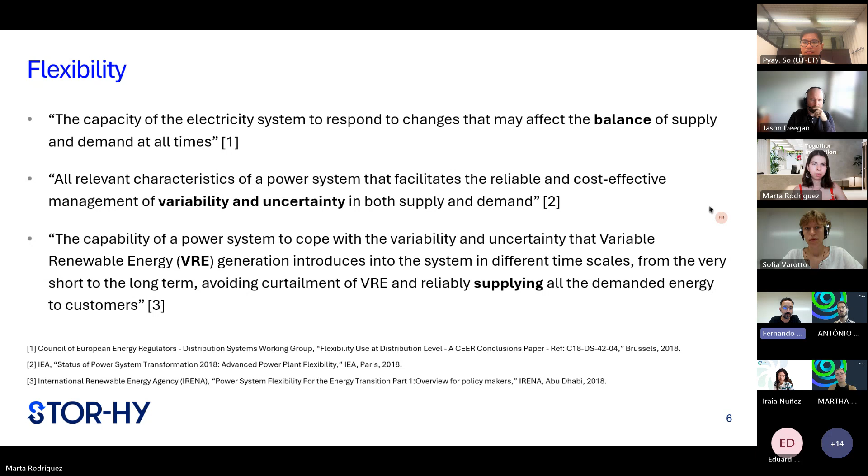So, okay, so flexibility can be used in many different ways. Okay, so the first one is power. So, oh my God.

Sorry. So the first one is power, balancing and frequency regulation. As you know, frequency is a system-wide measurement. So, sorry, I don't know what is happening. Sorry. So power is used for the short-term balancing of the power system, basically balancing supply and demand.

If we talk about the second topic, which is energy, this is medium to long-term system adequacy and resource scheduling. This can range from hours to multiple years. So it's a completely different approach to flexibility from power.

Then flexibility can also be used for power transfer capacity, for congestion management, and it ranges from minutes to hours.

And finally, there is also the possibility of using flexibility for voltage stability, which is a very important topic, as in Portugal and Spain there was a blackout a few months ago, related to this topic, which is reactive power control. Flexibility can be used for enhancing voltage stability, and this ranges from a few minutes to tens of minutes.

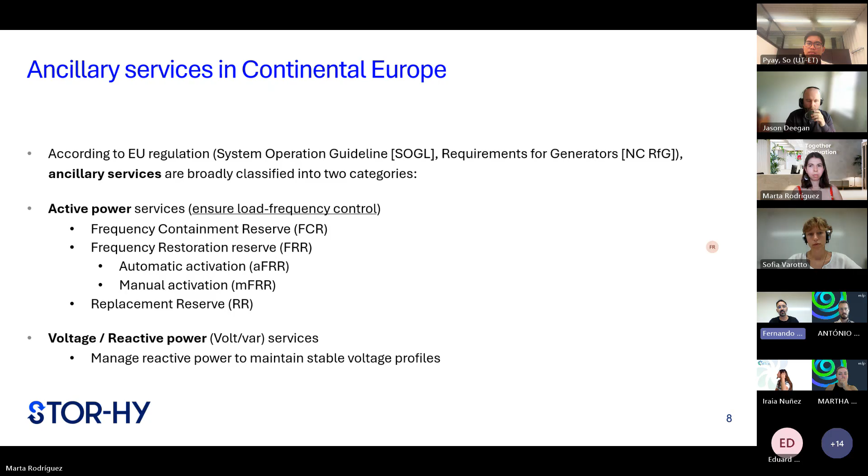This is loosely the load frequency control, which involves sequential reserves that I'm going to talk about in more detail here. And then there is the management of reactive power to maintain stable voltage profiles. We will go into detail on this now.

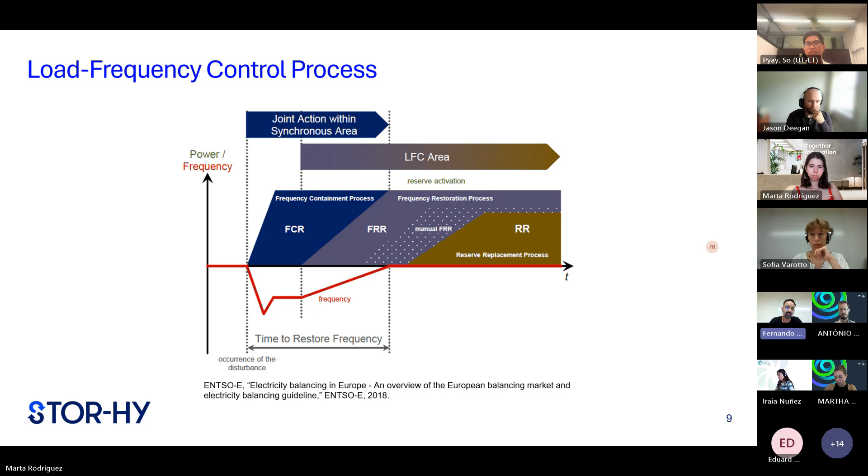So again, the FCR has the objective to contain the frequency immediately after an imbalance, and this is ensured by local controllers in each of the power plants that participate in the FCR. What needs to be ensured is that in less than 30 seconds, there is a full activation of this reserve. This needs to ensure that the transient frequency must not go below 0.8 Hertz, and the steady state frequency must not go below 0.2 Hertz.

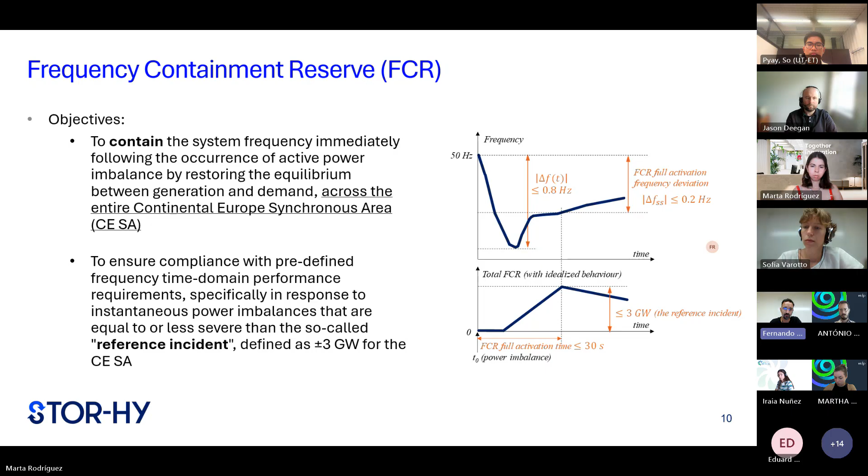So this is how it is dimensioned, and this is relevant because each of the power plants shares a burden of this reserve. In terms of the technical requirement by the European TSOs, the frequency containment reserve is designed to ensure a reserve of 3 gigawatts, which is the reference incident, or the loss of the 2 biggest power plants in continental Europe.

Then we have the frequency restoration reserve, which has the duty to control and restore the frequency to two objectives: to restore the frequency value to 50 Hertz, and to ensure that the active power balance between the different control areas, meaning the import-export, is as it was established before the incident. The area control error is a linear combination of these two measurements: the frequency deviation and the active power deviation from the interconnection flows.

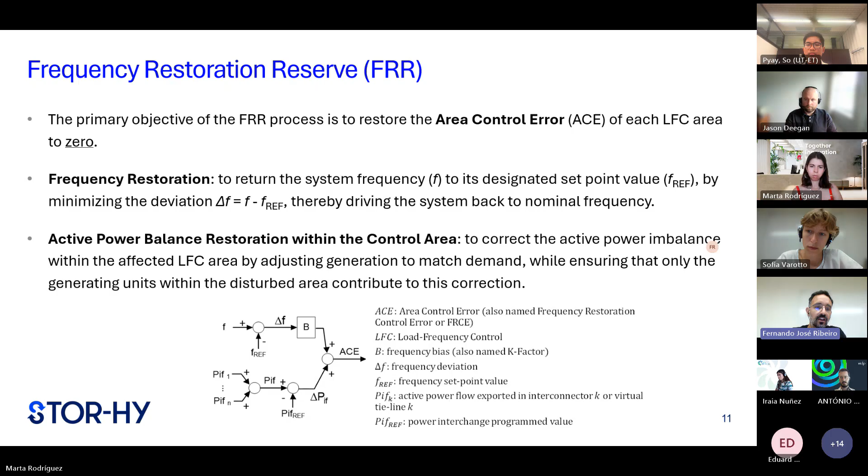And then the frequency restoration reserve is divided into two different requirements. The automatic frequency restoration reserve is activated, as the name says, automatically, by a signal dispatched by the TSO to each of the power plants participating in this reserve, and the plants must respond in less than 30 seconds. They must ramp the power up and down, and the other requirement by the TSO is that the time to restore frequency is 15 minutes, meaning the full activation time of the reserve has to be less than 15 minutes.

And then we have the manual frequency restoration reserve, which is manually activated by the TSO. This is not an automatic signal generated by a control device; it is manually activated. In fact, the time to restore frequency is also 15 minutes, but this is sequential. So when the aFRR is not enough, the TSO activates the manual frequency restoration reserve remotely.

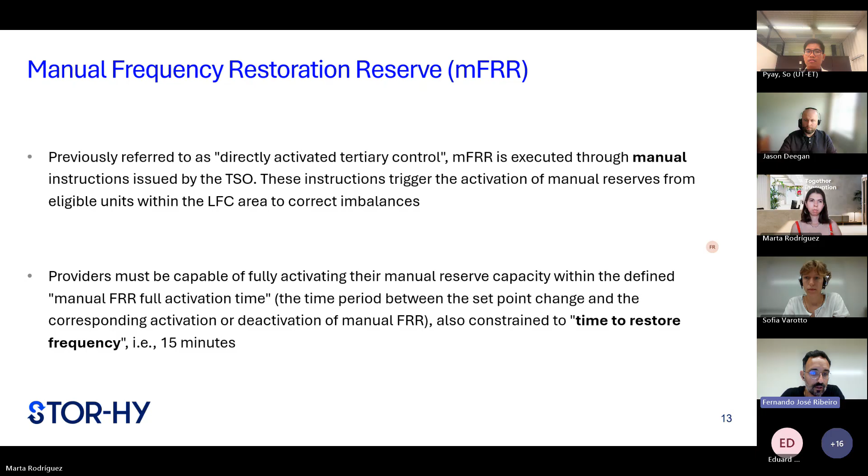And then finally, there is the replacement reserve, which gradually replaces the previous layer of control. This is for longer time horizons, with a time frame ranging from 15 minutes to 1 hour after the initial disturbance.

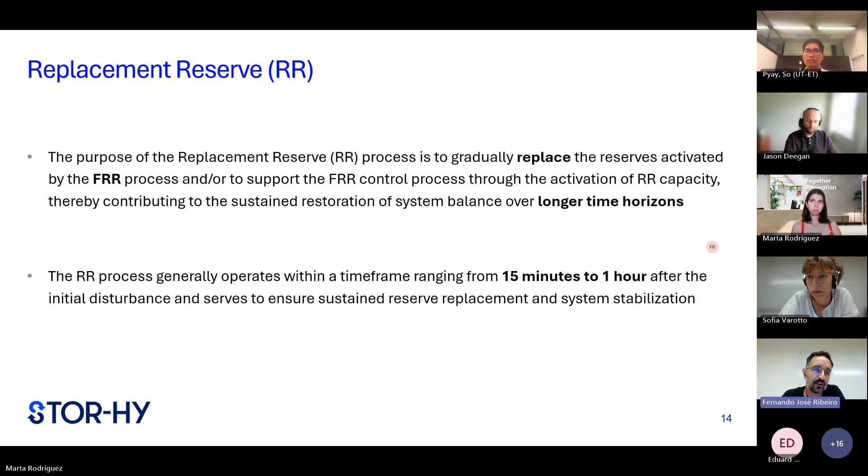So again, as you can see, we have fast reserves from 30 seconds onward. We have one type of reserve, then another, and then another. So there are different requirements. I will not go into detail on all of them. This has been harmonized in Europe, and I will show you the existing initiatives afterwards.

So now, different topic: voltage and reactive power. This is a combination of manual and automatic controls. The objective is to ensure that voltage levels and reactive power flows are acceptable for the TSO.

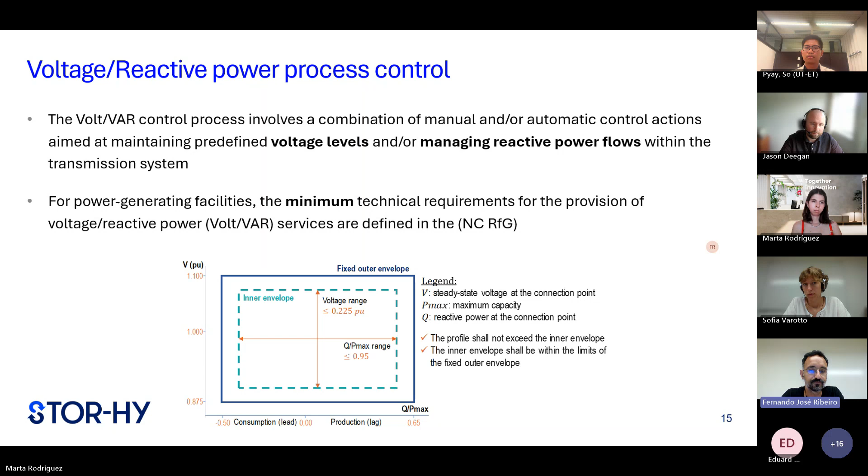Then we have something which is not yet in continental Europe, an ancillary service called synchronous inertia. Basically, this is a physical property of rotating machines that allows them to store kinetic energy and inject it into the power system whenever there is an imbalance. They have a fundamental role in stabilizing the frequency after this active power imbalance.

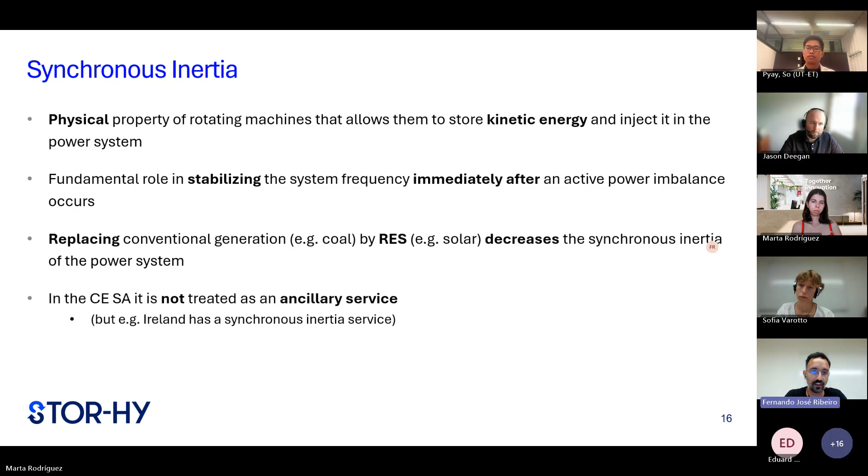The fact is that replacing conventional power plants with renewable energy is decreasing the synchronous inertia in the power system. So maybe in the future this will evolve as an ancillary service, such as what is happening in Ireland now, where there is a minimum inertia requirement for dispatch, and maybe there will be a remunerated service in the future. So far, it is not the case in continental Europe. So, synthetic inertia.

The fact is that renewable generation is interfaced with power electronics to the grid, and although they do not contribute kinetic energy for synchronous inertia, they can provide synthetic inertia, which is a controlled active power response, typically proportional to the derivative of the frequency, and this can actually be used as a faster way than the frequency containment reserve.

So on the one hand, they do not ensure the inertia provision that is instantly provided when there is an imbalance. On the other hand, they can provide a service that is faster than the fastest service that exists nowadays. This is relevant because some pumped storage plants can also be interfaced with power electronics, and they can provide synthetic inertia.

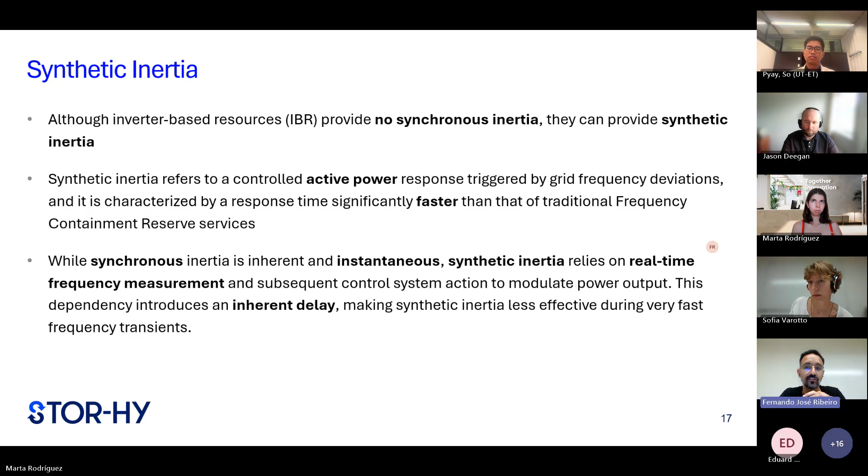The fact is that this relies on an instantaneous real-time measurement of the frequency, so this will never be as fast as synchronous inertia. There is a delay, but in fact, in the future this will be used as an ancillary service.

Alternatively, there is fast frequency response, which is normally a step response for active power. This is also faster than the frequency containment reserve, but it will not respond proportionally to the rate of change of frequency—it will be a step response of active power.

This already exists in some markets, such as the Nordics, the UK, Ireland, and Australia. Although this is not implemented in continental Europe yet, and it's not planned for the medium term as far as we are concerned, maybe in the future this will be an ancillary service, and we are considering it in the STOR-HY project.

So then there is Black Start. There was a blackout in Portugal and Spain some months ago, three months ago, and this was much discussed afterwards, because Black Start is the capability of the power system to restart operation after a blackout—starting from a completely de-energized state and slowly re-energizing parts of the grid.

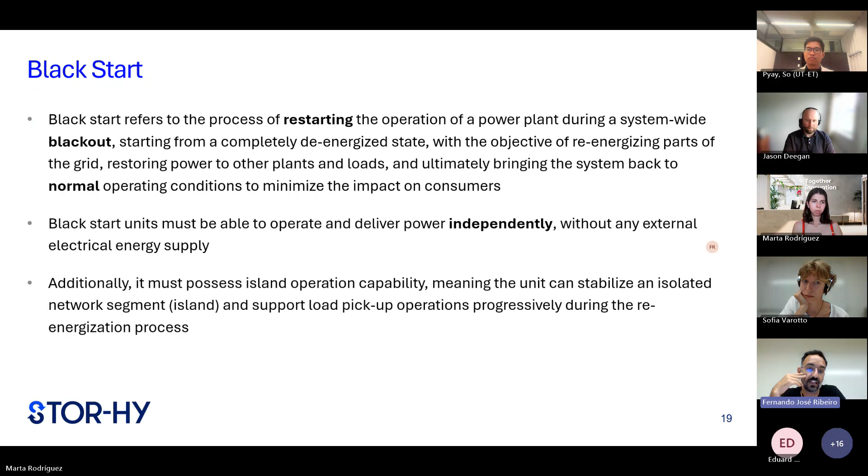Black Start units need to be able to operate independently without being supplied by the grid, since they are the ones energizing the grid. So the power plants with this capability must be able to operate in island mode, with very wide frequency oscillations and so on. Hydropower units are candidates for this, as is the case in Portugal.

And then what I will show you from now on is that the European Union has very ambitious objectives of integrating all these markets I've been talking about, basically harmonizing all these products all over Europe, so that the main objective would be to integrate all these markets into a single market all over Europe, to ensure market efficiency and market liquidity and so on.

So I will start. This will be just a brief overview. In the deliverable that we finished just now, there will be lots of detail.

So basically, for the FCR, frequency containment reserve, already 50% of the needs for continental Europe are already integrated in a single market platform. 9 countries are participating. This is a symmetric product, meaning upwards and downwards reserve need to be provided in the same power range. The duration of this product is 4 hours. There is a minimum and maximum bid size, and each country has to provide minimum and maximum. This is due to the fact that it ensures no free riding and no constraints in terms of power transfer capacity.

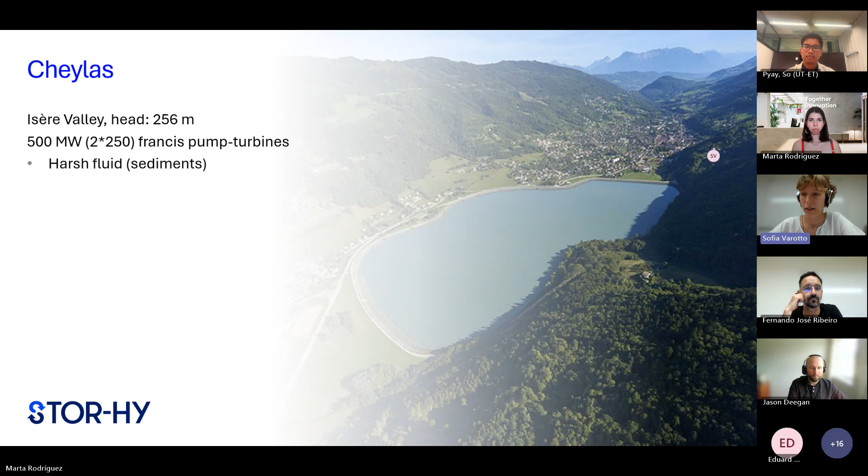It is, as we said, characterized by harsh fluid, so with a high level of sediments and a high pump turbine cycling. So the 2 main objectives in STOR-HY will be to enhance flexibility by also enabling faster response to the market,

and to minimize the start and stop cycles through the development of innovative mode changes through a fast dewatering scheme. Then the wear and tear impact of these fast mode changes will be assessed, and also the transfer of sediments

between the upper reservoir and the downward reservoir, which could have some environmental benefits, will be considered, but also the possible effects on overall efficiency that could be decreased by this addition of sediment transfer.

Moving to La Rance, the tidal power plant, it is located in an estuary, as you can see from this picture, so the head is very low because it depends on the water level difference created by tides. It is composed of 24 bulb turbines of lower power.

The challenges that this plant presents are mostly related to salt water. So the first one is corrosion of the mechanical components that need to be maintained and also probably replaced more often than a plant operating in non-salt water, so in a river.

And mussel fouling, so the possible growth of bio-organisms on the mechanical components that can also hinder the efficiency and that needs to be removed periodically. Another thing that hinders the flexibility of this plant is that electricity generation is strongly dependent on the tide schedule, so it is not easily adaptable to market signals.

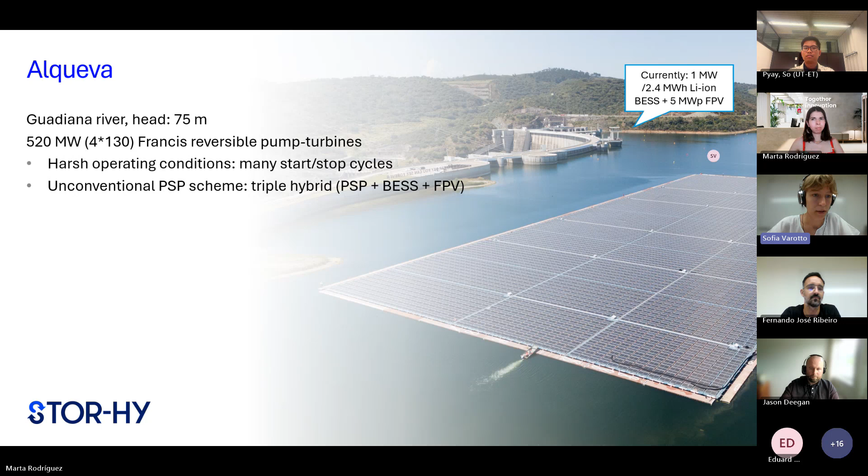So the objective for STOR-HY will be to explore to the fullest the possible benefits from this triple hybridization, both in terms of flexibility and in terms of wear and tear.

First of all, there will be the development of an innovative energy management tool to also enable the participation of this plant in ancillary services markets, or improve the current participation in these markets, and also to minimize the wear and tear of the hydro machinery.

So the fact that the battery can be combined with the hydro energy generation from the hydropower plant can reduce the wear and tear due to fast power changes in the hydro machinery.

Okay, finally, there will also be some battery sizing studies aiming at maximizing the benefits of this operation. So it will be considered to enhance the capacity of the current battery energy storage system.

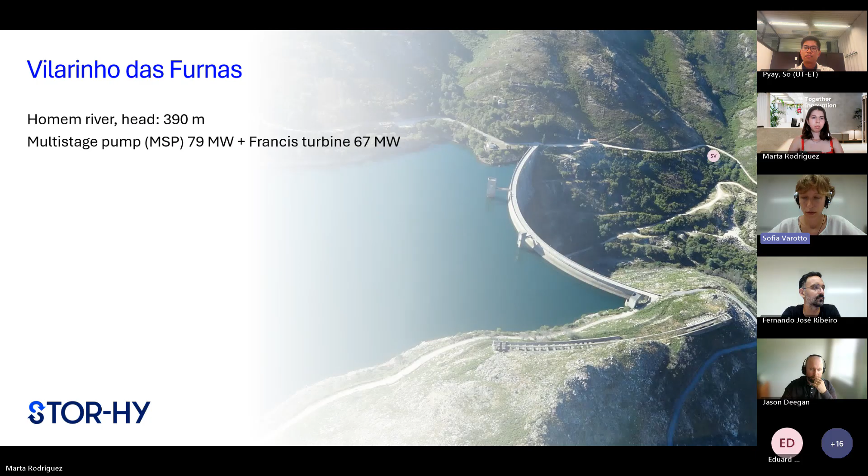Vilarinho das Furnas is located on the Homem River in the north of Portugal. It has a relatively high head of 390 meters and is currently composed of a multi-stage pump and a Francis turbine. The flexibility enhancement during STOR-HY will regulate the operation of the pump mode and turbine mode with the operation of the main inlet valve, without using variable speed solutions, just operating the inlet valve.

For this reason, there will be a need to assess the impact of the inlet valve in terms of wear and tear. Fatigue models will be developed for this valve, along with an advanced valve control algorithm to minimize the wear and tear.

Finally, Pozo Figueiredo, which is currently located in a coal mine, as you can see from this picture. It's a pioneering scheme to reconvert an old coal mine into a pumped storage system. It is composed of 3 mine pit reservoirs with 2 different heads, and 1 pump and 1 turbine of 100 kilowatts each.

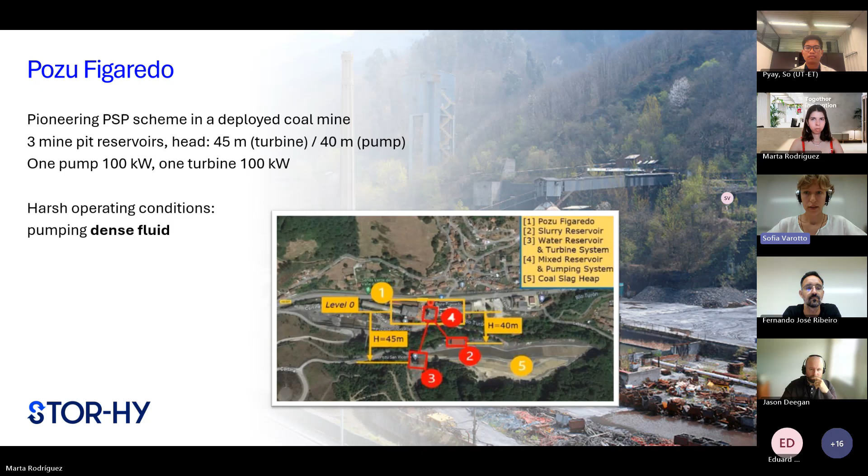The harsh operating condition that characterizes this plant is the dense fluid that needs to be pumped and turbined. For this reason, in STOR-HY, attention will first be given to the plant commissioning that is currently being constructed. Then hybridization with a battery energy storage system and a photovoltaic system will be considered, and an energy management system for this combination will be developed.

Now let's move on to the flexibility matrix, which, as you can see, is defined as a preliminary version because this is the very beginning of this project. I will present to you the structure of the matrix and the first ranking for the base configurations.

This matrix considers the techno-economic regulatory dimension of STOR-HY, and it encloses the ranking in terms of capability of providing ancillary services to the grid from each of these plants. In the preliminary version, only the base configuration or existing configuration will be evaluated.

The ranking will be based on a traffic light system, so it will be qualitative and will just give some preliminary evaluation of the capability of this ancillary services provision.

This is the color system that we're using to fill in the matrix. In red, when the plant is considered not to be capable to provide that service. In yellow, when it is considered capable, but with a limited capability that in some cases can be enhanced with the technological solution proposed in STOR-HY.

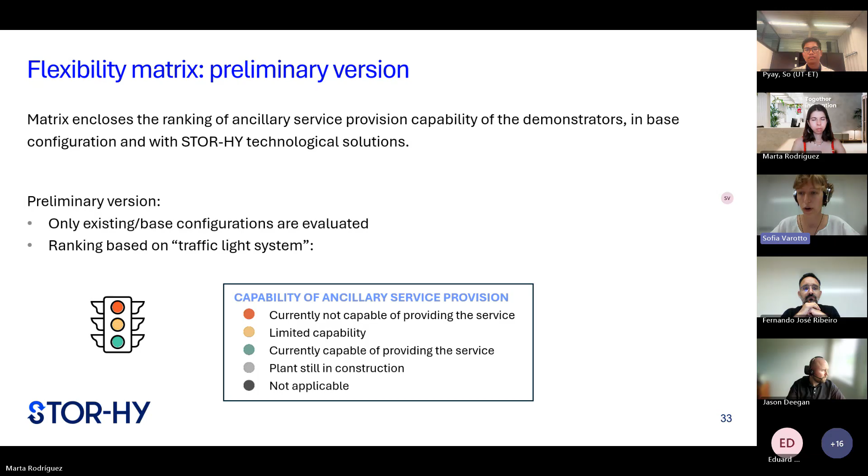This is the structure of the matrix. I will go through the different components of it. In the top part, there are the ancillary services, and in the bottom part, the traditional definition for those. So synchronous and synthetic inertia, and then the frequency support services in order of rapidity of operation. Then the voltage and VAR control, and finally the black start operation.

On the left side, there are the demonstrators that I just presented to you. On the right side, there are the different technological solutions that will be developed for each demonstrator, particularly the ones that have some impact on flexibility. Here is the legend that explains this.

In the base configurations, they are all considered to be fixed speed. In some cases, variable speed will be implemented. In other cases, just a reduced scale power converter, and hydraulic short circuit and hybridization with batteries and photovoltaic. On the bottom, there are the emerging European framework definitions for the different services, as Fernando explained. Here is the legend of the colors, just to start filling up this matrix.

First of all, the black dot means that the plant is not considered applicable for that particular service. This is the case for synthetic inertia and fast frequency response in fixed speed units, because of the hydraulic dynamics of the hydro units, it is considered that these very fast services cannot be provided. So it does not even make sense to evaluate this ancillary service.

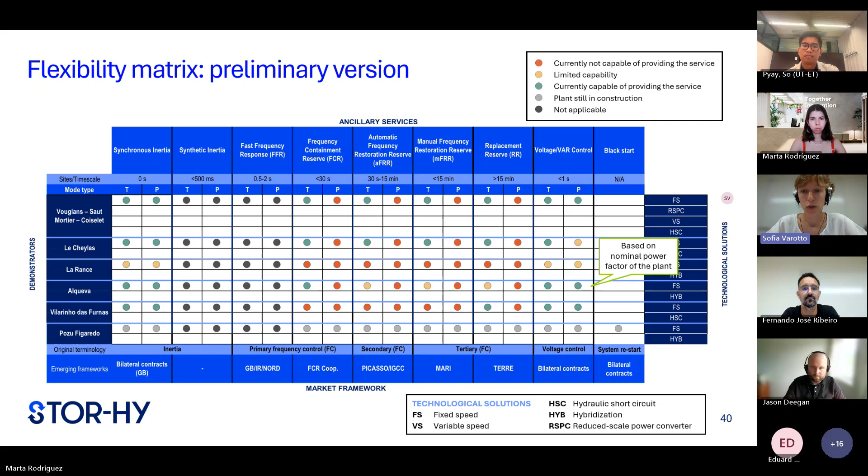Moving to voltage control, we obtained this ranking from the nominal power factor of the plant, which relates to the capability of providing reactive power. We see that in most cases it is quite good, except for La Rance, which has a relatively low power factor. Finally, in Black Start, we see that none of the plants is currently capable of providing the Black Start service except for Le Cheylas.

Le Cheylas is characterized by a startup time of 5 minutes and a ramping capability from 0 to full load in 2 minutes.

So this is the current version of the matrix, the preliminary version that will be filled up along this project. Our next steps will be to transform this ranking from a qualitative traffic light type ranking to a quantitative system, obtaining numbers for which we will need to perform simulations enabled by the development of models for the different demonstrators along this project.

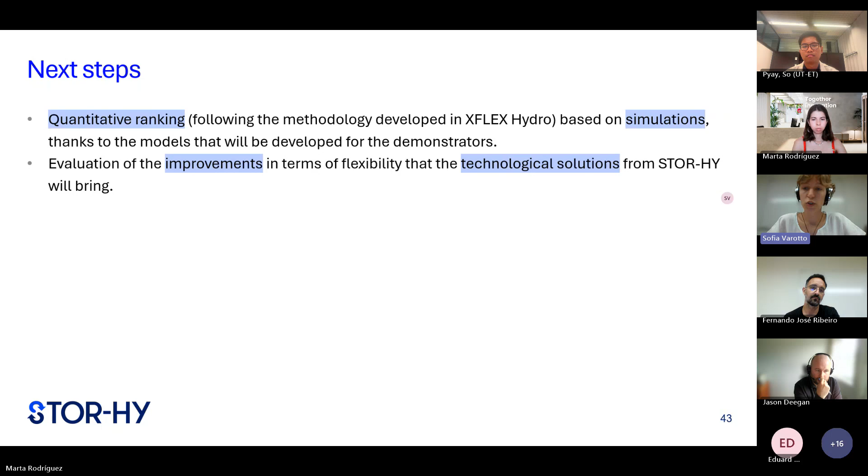We will also evaluate the improvements that the technological solutions in the different demonstrators will bring, particularly in terms of flexibility. Our expectation is that variable speed will enable the provision of the very fast services that Fernando explained, such as synthetic inertia and fast frequency response, and will also generally increase the flexibility of the plant, even in pump mode, which is currently considered not flexible.

The implementation of hydraulic short circuit, meaning operating the pump and turbine at the same time, enables regulation of the net power when in pumping mode. If the power of the pump is fixed, by regulating the power of the turbine, the net power absorbed by the plant will be regulated this way.

Then hybridization with batteries and photovoltaic will also enable faster responses, faster frequency support services, and improve the services currently being provided. There are also other flexibility-related features not directly categorized as ancillary services that can be improved by these solutions, for example market participation or the capability of shifting load. As we said, this first flexibility matrix only considers the techno-economic regulatory part, the flexibility side of these demonstrators and the improvements.

So for the next sections about the environmental aspect and the social aspect, I will leave the word to my colleagues.

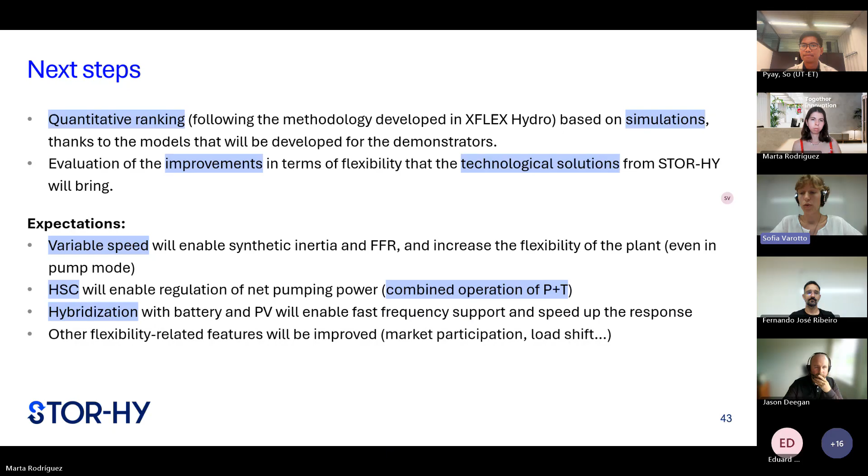Hello everyone, now let's move on to the environmental and economic dimensions. I'm taking over the slides.

All right, so in this session I will present three key components. I will start with the process of indicator selection and then what indicators we have selected, and then I will briefly explain the methodological approaches that we will use to quantify these indicators.

So we started with selecting which indicators we will measure in this deliverable, and the assessment will be done in another work package, work package 7, and then results will be integrated back to the STOR-HY matrix.

For this, we will use the combination approach of practice and science. On the practice side, we are developing the assessment models and collecting the necessary data for the case studies for each demonstrator site. On the science side, we have explored different indicators and existing methods for the development of new indicators and improve the methods to quantify the environmental and economic dimension. So this is basically the general approach and overview of our plan.

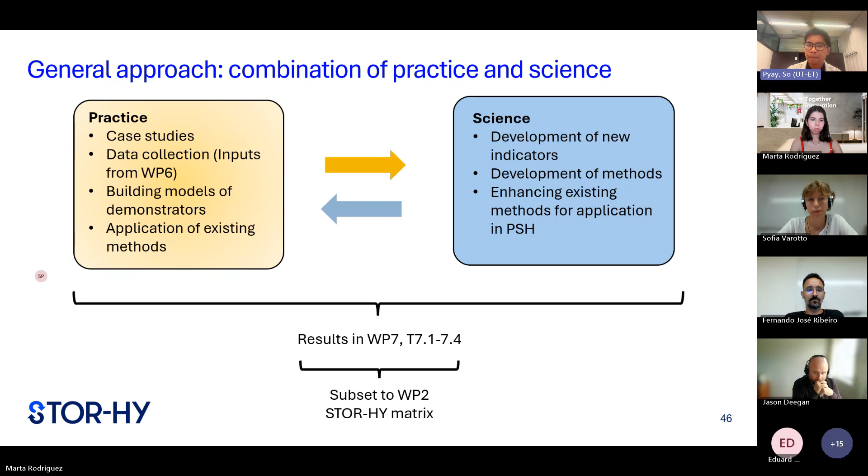So here I would like to explain a little bit more about the process of selecting the indicators. There are many possible indicators that we can use to quantify the different aspects of environmental and economic dimensions. First, we try to keep it open to explore what indicators are available. We did a literature search to collect all the possible indicators from international standards, guidelines, and scientific papers.

Initially, it was like a big menu card with a lot of possible indicators and options. We presented the initial selections of these possible indicators to our project partners so that they could provide us their inputs and suggestions. Then we came up with the final selections of the indicators, which was also proposed and presented to our project partners for the final selection. Now we have this final list of the indicators, and we will continue the quantification of these indicators in another work package.

So what are the indicators that we selected? Basically, there are three categories of environmental indicators and one category for life cycle economic indicators. For example, for environmental indicators, we have biodiversity impacts, in which we will measure the local biodiversity impacts occurring due to on-site hydropower operations, and also supply chain biodiversity impacts. I will go into more detail in the later slides. There are also other impacts such as life cycle impacts, which will cover carbon footprint, water footprint, land use changes, and resource dissipation. There are also circularity indicators, which cover resource dissipation and recycling rate. And for the economic dimensions, we will use CapEx and OpEx.

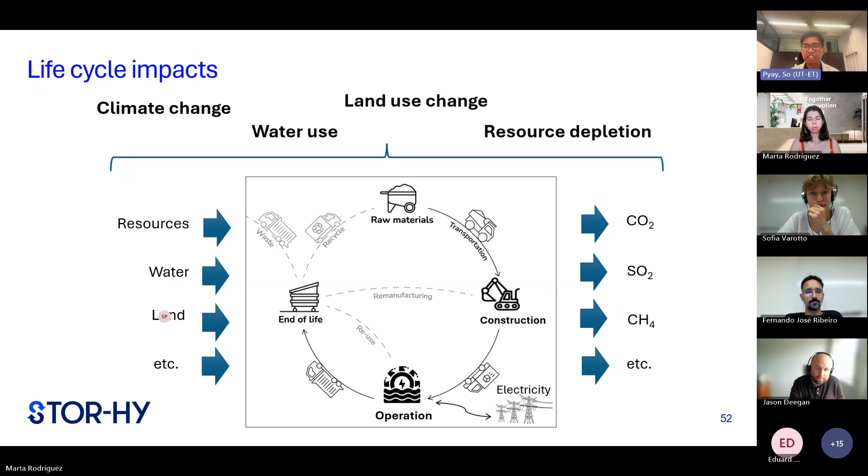The second category of impacts that we consider is the life cycle impacts. This diagram shows the general illustration of the life cycle of the pumped storage hydropower plant. Throughout its life cycle, it uses inputs such as water, resources, and land, and it releases outputs such as emissions and waste. These consumptions of resources and releases of emissions might cause other impacts such as climate change, water use, land use, and resource depletion.

In our analysis, we will cover these impact categories in addition to the biodiversity impacts. When we quantify these impacts, some parameters could vary temporally, which can affect the results. For example, if the electricity used for pumping water to the upper reservoir comes from the grid, and the grid mix varies temporally, the environmental performance of the pump storage system could also vary. This issue was not reflected in previous scientific research, and we will consider these temporal variations in our analysis.

To quantify these life cycle impacts, we will use the life cycle impact assessment approach. First, we will start with the conventional way of doing the LCA. In this conventional approach, we don't consider the temporal variations first. Therefore, we can quantify these impacts in terms of the static results.

Then we will improve this assessment approach by integrating temporal resolutions in our analysis, such as variations in electricity mixes, reservoir emissions, and storage technical improvement solutions. This assessment approach is called the dynamic approach, which will provide us LCA results in terms of dynamic results. By comparing these two sets of static and dynamic LCA results, we will be able to see how considering the temporal variations can provide more realistic results.

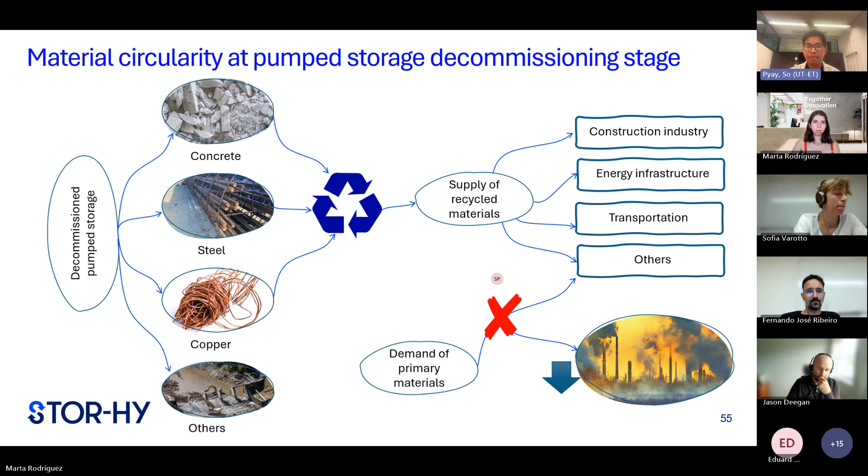The next indicator we consider is material circularity. When hydropower projects are decommissioned, one possibility is to deconstruct some infrastructure, which will generate construction and demolition waste. Some of this waste can be recycled, providing a supply of recycled materials to other industries in the future. This will hypothetically decrease the demand for primary materials, and also the production of these primary materials. When you decrease the production of these materials, it will also decrease the environmental pollution from this production process. So the circularity of construction and demolition waste is important to understand a more complete picture of the environmental impacts, and even possible environmental credits, in pumped storage projects.

This is why we will consider this indicator in our analysis. Our methodological approach for this indicator has two steps. First, we will focus on the current conditions. We will estimate the quantity of construction waste, such as concrete, steel, and copper, from the decommissioning phase. Then we will set the circular economy scenarios considering current practices and conditions.

Then we will conduct two assessments. The first is how circular the material is, in the circularity assessment, and how much environmental impacts might occur under each scenario. This part of the assessment will give us the circularity and environmental consequences under the current conditions.

But these conditions could change in the future, because the pumped storage project has a very long lifespan. So we need to forecast the future conditions for this circular economy scenario. To do that, we will review other supplementary models and incorporate the outputs from these models into our analysis, which will improve the scenarios we develop for future conditions.

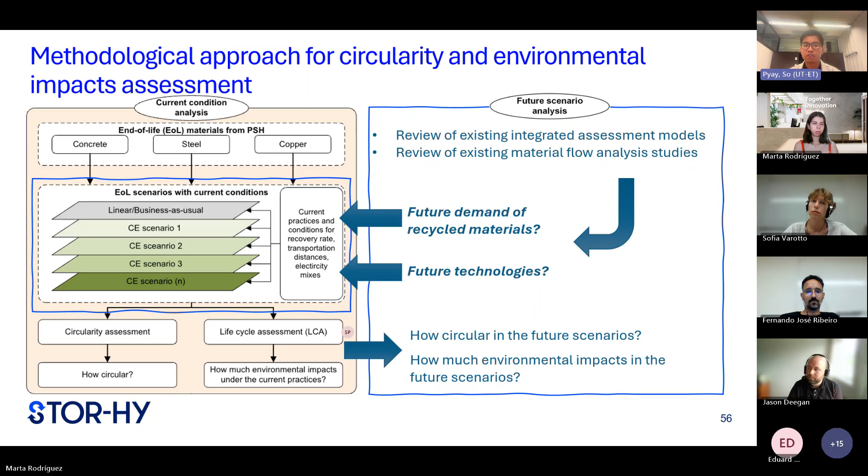Then we will repeat the process of circularity assessment and life cycle assessment to get results in terms of the future scenarios. In the final step, we will compare results for the current conditions and future scenario, which can be used for better understanding of the potential environmental trade-offs and credits for policy making of the decommissioning phase.

I think I have... can we return to the previous slides?

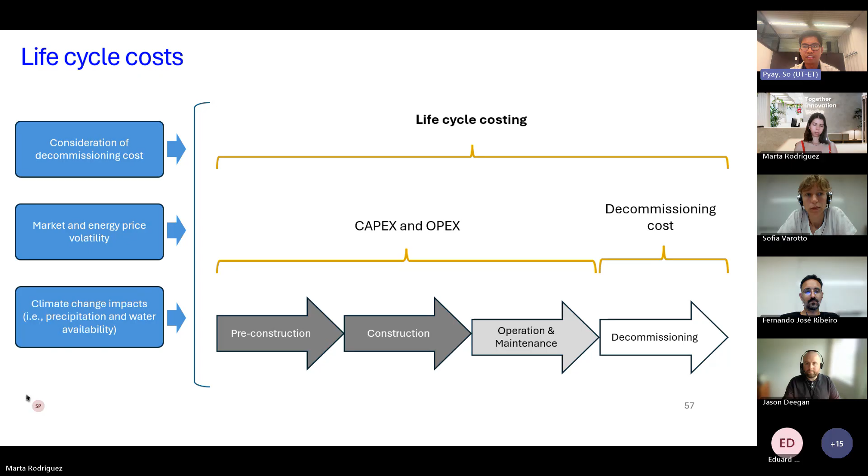The third component we will consider is climate change impacts on hydropower operations. We will try to understand how changes in precipitation and temperature patterns will affect pumped storage activities and evaluate their impacts on the life cycle cost of the pumped storage system. This will help us determine whether these changes will have a negative or positive effect, particularly on pumped storage operations.

So a few key takeaways. I talked about the environmental dimensions and economic dimensions. Under environmental dimensions, we have a total of 8 indicators: 2 biodiversity indicators, which will potentially be combined into a single indicator, 4 life cycle indicators, and 2 circularity indicators. For economic dimensions, we have 2 indicators, CapEx and OpEx, and these indicators will be quantified in work package 7 and incorporated back into the STOR-HY matrix.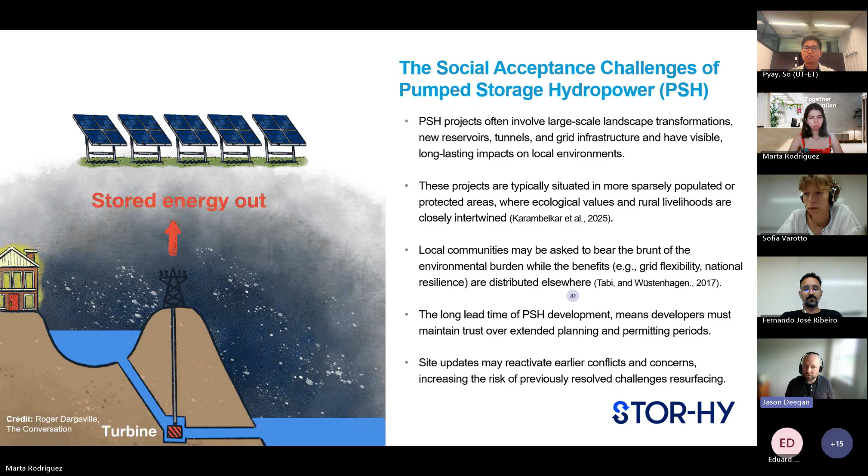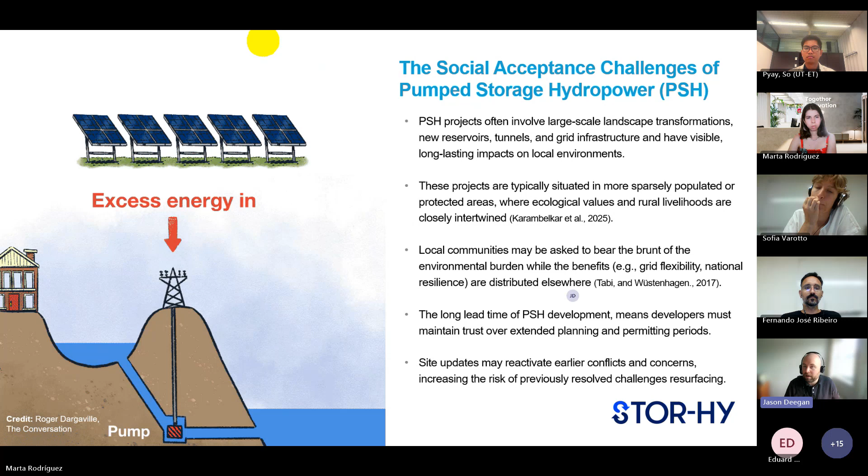What they initially thought was good and fair and right, they're now seeing as too burdensome, and that can lead to an evolution in how people perceive these types of sites and changes. There's also this aspect, probably quite relevant in the STOR-HY project, that site updates may reactivate earlier conflicts and concerns, increasing the risk of previously resolved challenges resurfacing. So projects initially developed in the 60s, 70s, or 80s, now going through periods of updates, may reignite earlier conflicts or contentious debates about the very presence of these sites, which were largely put to bed while the site was operational. Talking about changes brings up new issues and may lead to the reemergence of older issues as well.

If you're like me, you're probably getting a bit dizzy from this GIF on the side there, so I'll switch on to the next one.

A lot of the work now is linked to more clearly capturing community acceptance, and deeper issues of procedural fairness, distributive justice, and recognition. So there's much more need for dialogue, rather than capturing it like a thermometer in the water and taking the temperature. It's more about building social acceptance through dialogue, understanding concerns, and addressing them in a mutually beneficial way if at all possible. That's the trade-off we're trying to capture here.

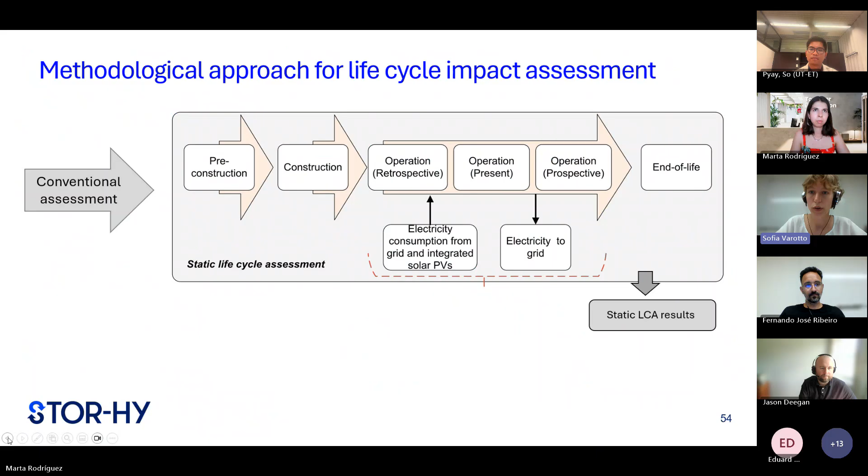So, okay. Just let me know when I'm there. Okay, I'm sorry for taking... no problem, sorry. Okay, this is, okay. I don't know, Vouglans is the first one.

Okay, can I maybe take control again? Okay, so from Vouglans, the improvement in terms of flexibility will be mostly related to the addition of pumping capability in the downstream plant, the one between Saut Mortier and Coiselet. This is an enhancement in terms of storage capacity.

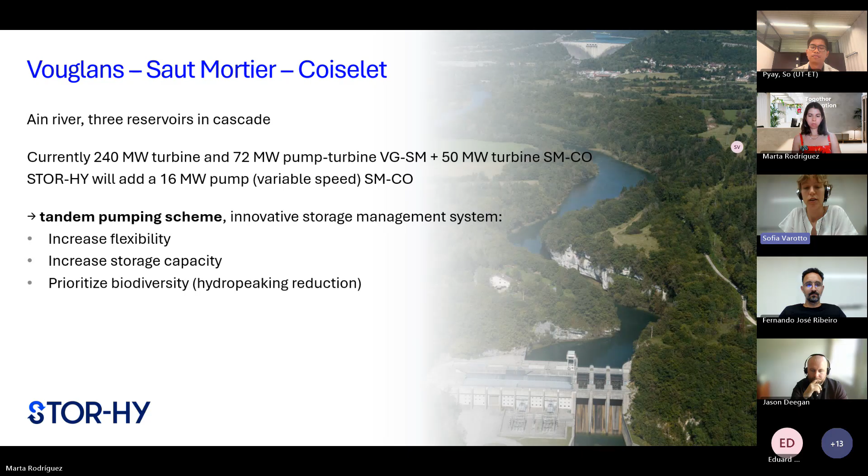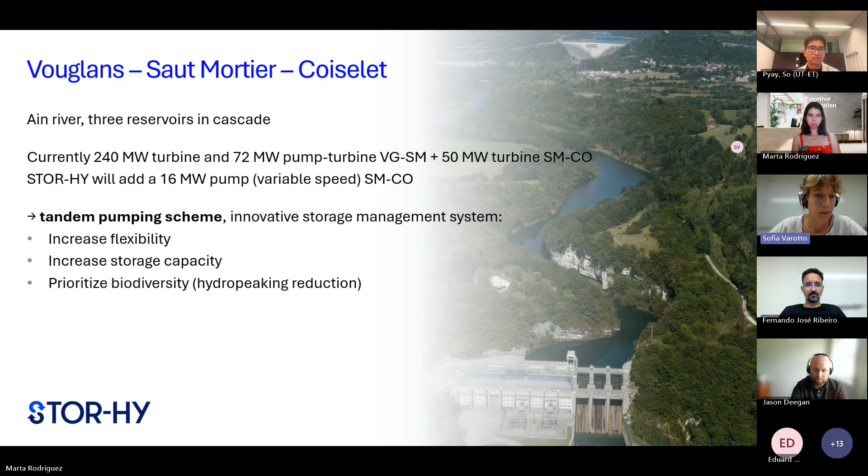And also among the features that we have in the matrix, if I am not wrong, yes, okay, it is also here. The second pump that will be installed will also be provided with variable speed, connected with a power converter. Variable speed allows the pump to regulate the power more flexibly, to provide different ancillary services from the pump, which is installed between Saut Mortier and Coiselet. So I would say from Vouglans, this is the biggest improvement in terms of flexibility.

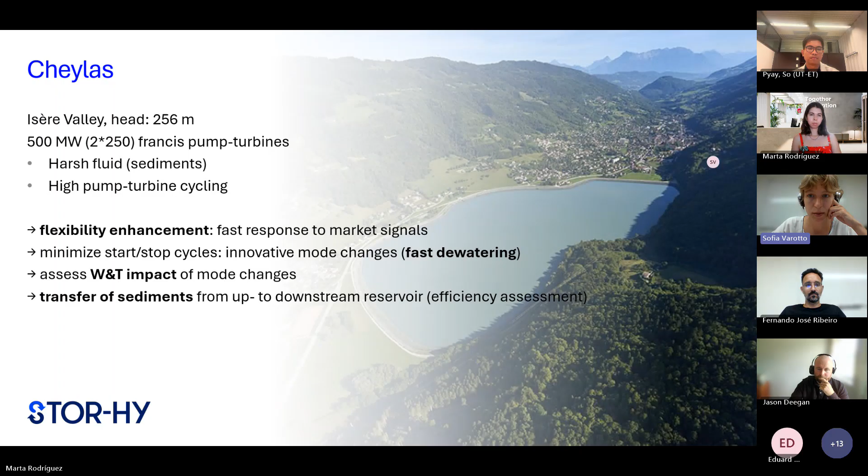For Cheylas, this innovative mode change provided with fast dewatering will increase the flexibility, the fastness of response to some signals that can be market signals, but in general it will make the plant more flexible and more rapidly able to change between modes. For Larance, the flexibility enhancement will be mostly connected to the addition of a battery. As the battery is able to respond very fast to control, it can provide ancillary services, it can provide faster response also to market signals.

So also reach higher revenues from the electricity market. From Alqueva, similarly, we have the addition of this battery that can also in the next step, when we delve into the sizing studies, also be enhanced. And also, of course, when the solar resource, as Fernando mentioned, is available, the photovoltaic can be involved in the provision of ancillary services.

Then in Vilarinho, the flexibility will be achieved mostly with the mechanical operation of the inlet valve.

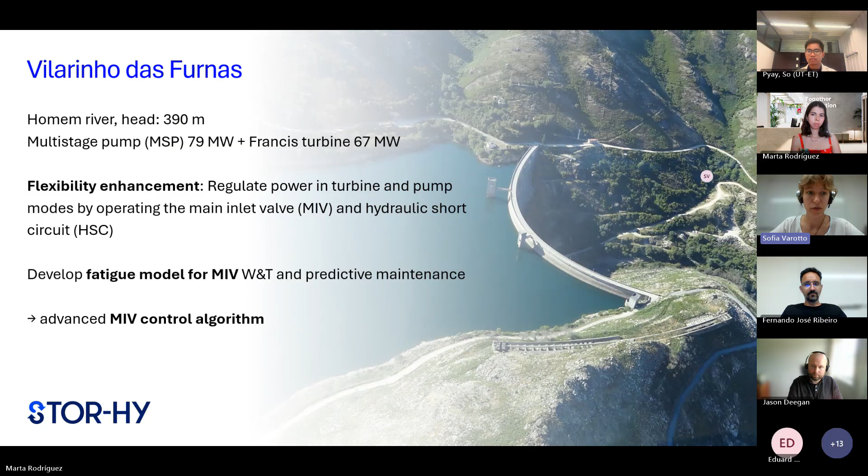And also with a hydraulic short circuit, since we have a turbine and pump operated separately, they can also be operated at the same time to perform this hydraulic short circuit, so that the net power input in pumping mode can be regulated through the regulation of the turbine power.

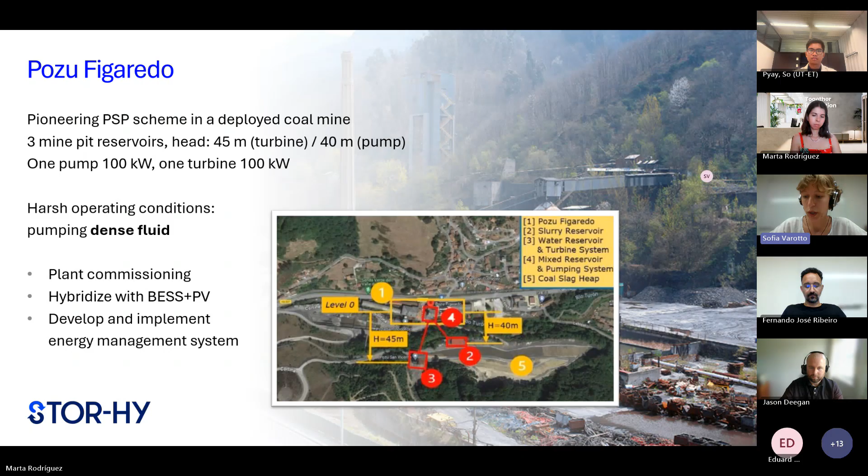And in Pozu Figaredo, I would say that most of the flexibility enhancement will come from the hybridization, still with the battery and the photovoltaic system that can be installed on site. This is what we expect mostly in terms of flexibility enhancement.

But I can also move to the metrics to consider the different technological solutions. So we have some plants that involve hydraulic short circuit, some that involve hybridization, and in the case of Vouglans, we also have variable speed. So yes, I would say this is mostly what we expect in terms of flexibility.

I don't know if Sofia can say something about the environmental benefits that can come from these demonstrators.

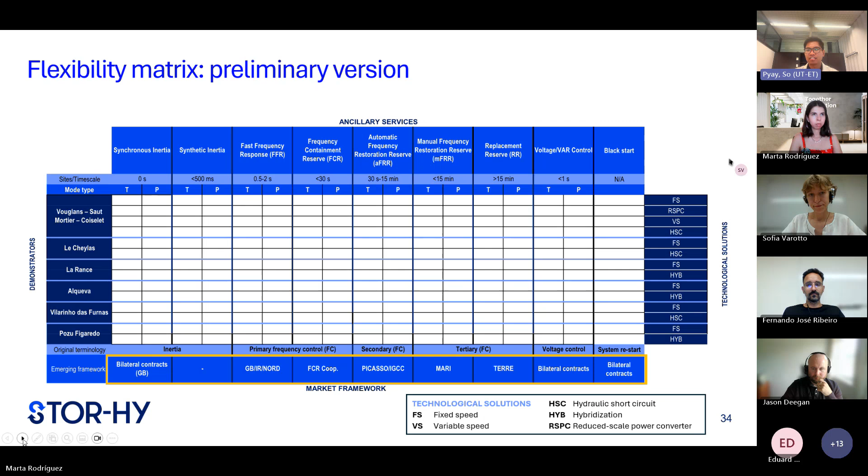Yes, thank you, Sofia. On our side, for the environmental and economic dimensions, there are two key components: the one I mentioned in the presentation, the practical side and the science side. On the practical side, we are currently collaborating with our project partners to collect data for the case study we will develop for each demonstrator site. On the science side, we have been exploring and developing the methodological approach used to quantify the indicators we selected in this work package.

So basically, the next step is to implement the models we developed on the science side with the data we collected for each case study of the demonstrator site. This is what we plan so far for the next step.

Thank you. Maybe my colleague Jason will mention something about the social dimension. Yeah, thank you very much.

Yeah, exactly. I think for us it's relatively switching into the same approach now. It's very much getting into discussing a lot more about collecting the data, and that's going to be done in conjunction with the demonstrators themselves. So as I said, we have the outline, we have everything basically covered in those dimensions, or we have the things we're interested in approaching covered in those dimensions. And now it switches to similarly collecting the data.

So that will be stuff that we will do, but also that we need to work with our demonstrator sites to develop. Yeah, that's our next step.